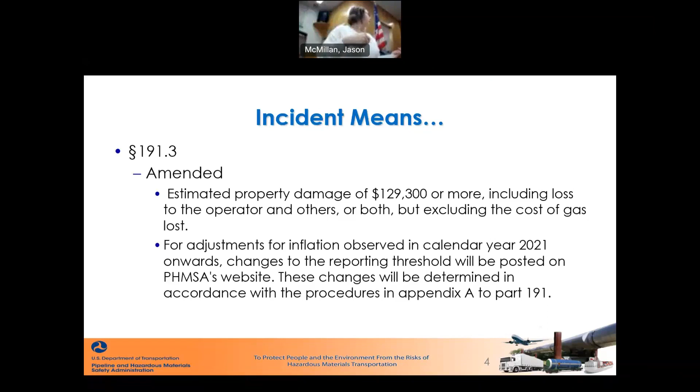That $50,000 threshold was put in place like three decades ago. So with the change in times, $50,000 happened in the blink of an eye, right? So a lot of things became reportable. Now it has increased, so you start at $129,300 — at that point it becomes reportable if there's that much in loss, property loss. That includes loss to you as an operator and loss to others, or both, but it doesn't include the cost of gas. And because it was not done this way before, from now on it's going to be getting adjusted for inflation from 2021 on. As these changes happen, it will be posted on the PHMSA website.

There is a formula in there that they created for making this determination and calculating the cost of living and all this stuff to make the adjustments. It's in Part 191.

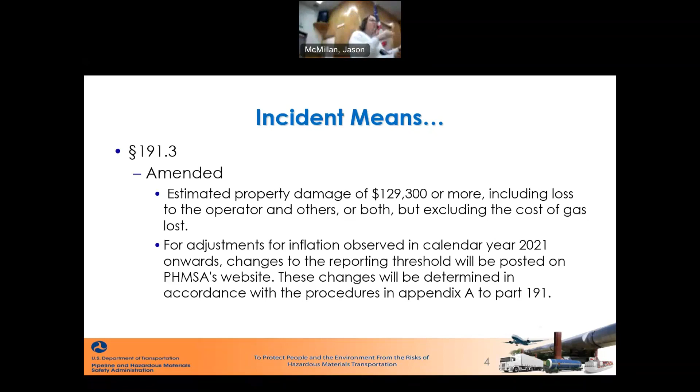Another thing that's going... I don't know, the projector looks a little off. Another thing that has changed in Part 191 was the number of the mechanical fittings failure report.

There used to be options, right, of submitting a dedicated report for things that failed. You could report it every month, or make a dedicated report with your annual report in March. So now the dedicated report has been eliminated. It's no longer required, but you still have to report it under the annual report, under Part C of your annual report. You'll report the number of hazardous leaks that involve mechanical joints.

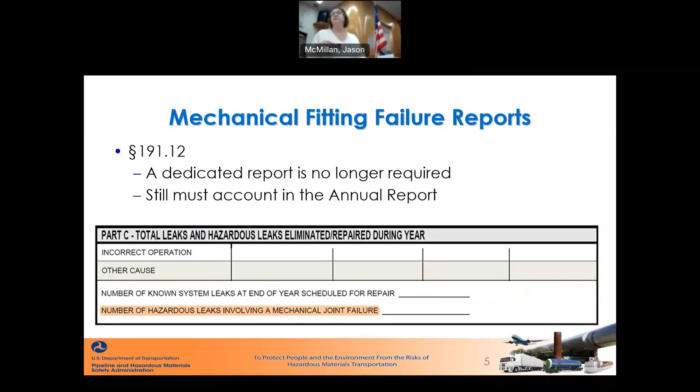One more thing is under safety-related conditions, and this is about reporting exceeding MAOP. It's always been in the code that you have to design the system so it doesn't exceed MAOP plus a buildup that's allowed over that MAOP. This situation has always been in the code, but it was never recognized as a safety-related condition. It had never been required to be reported. So now it has to be reported.

Every time there's an exceedance, and there are specifics under 191.23(a)(6), it will tell you exactly under which conditions those exceedances need to be reported. If your system exceeds MAOP plus buildup, then it has to be reported as a safety-related condition. That means it has to be reported in writing, in a letter titled safety-related condition, and under 191.23 it tells you exactly how you have to report it.

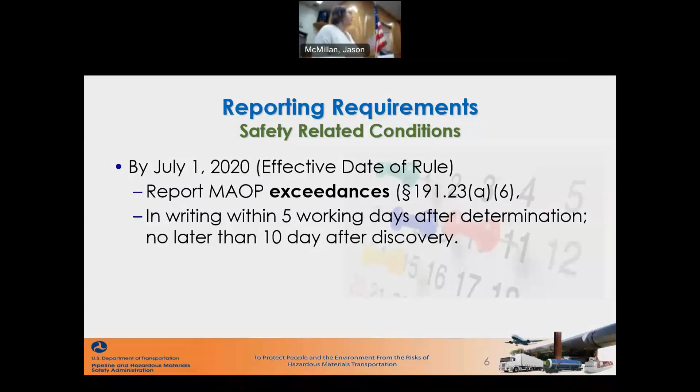Okay, so that's it for Part 191. For Part 192, there are 3 documents that have been incorporated by reference, 3 new documents.

API 1104 has been a document incorporated by reference, just updated to the 20th edition. ASTM D2513, 18A, is also an updated edition. And then ASTM F2620, 19 is a new document incorporated by reference for plastic fusion, and we're going to see where that one applies.

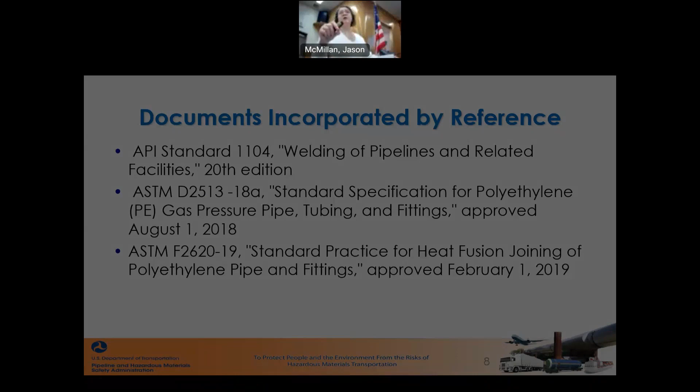That's one of the very important things about the code when you're looking at the incorporated documents, which are in 192.7. One particular thing about those documents is that it's a very specific version that is accepted by PHMSA. So if for whatever reason you needed to implement anything requiring those documents, you or your contractor need to make sure you're following the correct version that's in the code. It's not always going to be the latest, greatest, the latest version. Sometimes we have a 2004 document incorporated by reference in the code, so that's something to keep an eye on.

In the section on limitations for welding and welding operators, it was amended to include that welders can actually weld on a procedure they have done in the previous 7.5 months. Before, it used to be if they had not done this in 6 months, they could not weld to this procedure. Now that time frame has been extended to 7.5 months, but they have to demonstrate that the last time they did it, 7.5 months prior to the current date, it was acceptable under API 1104.

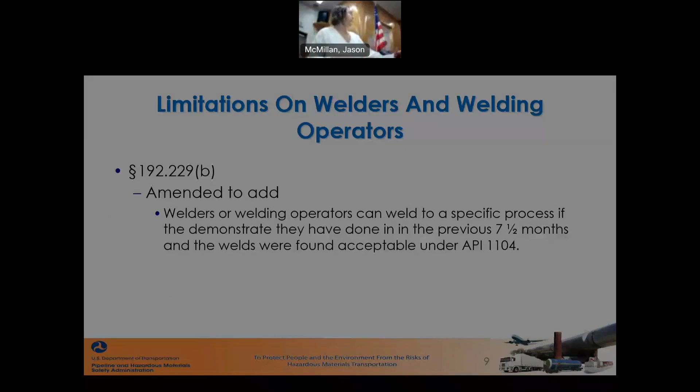For plastic pipe, the qualifying joining procedures under 192.283 was amended to eliminate requiring ASTM D638. Right now it doesn't require that the test be done to that specific standard; it just requires that it's done to a listed specification, meaning any specification that meets that.

And then under 192.285, for qualifying persons to make joints, it was amended to include that heat fusions, except for electrofusions, will be visually inspected in accordance with the new incorporated by reference document, ASTM F2620. So any heat fusion plastic joints, other than electrofusion joints, will be visually inspected following the procedures in the standard.

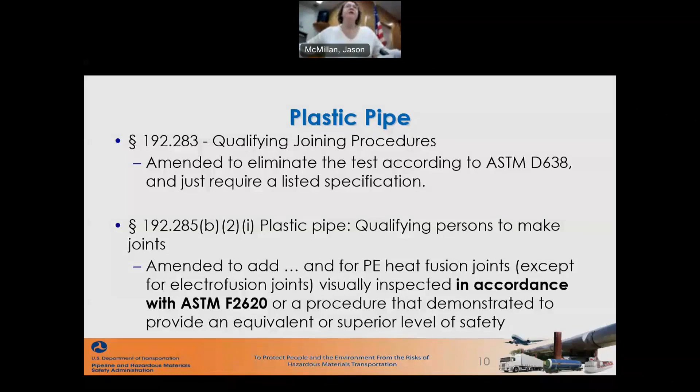That is a debate on whether that is, but a lot of times, most of the times, when a person gets qualified for joining, they also get qualified for inspecting in the same qualification. So it can be done by the same person. Yes, it has to be a part of the qualification.

All right, so when it comes to corrosion control under 465, if you had a rectifier, it had to be inspected every 2.5 months. Go there, inspect it every 2.5 months. Now it allows those rectifiers to be inspected remotely, but at least once a year it has to be done on site. So the 2.5 month interval can be met by doing a remote inspection, but at least once a year you have to go to the rectifier and look at it, lay eyes on it.

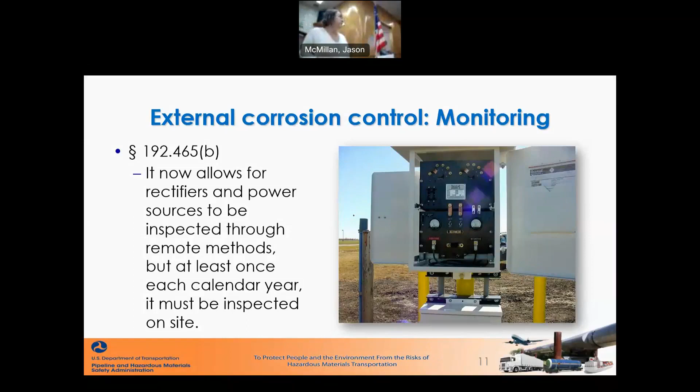No, not necessarily. This is probably pipe to soil potential readings, yeah. Oh, actually this is atmospheric corrosion. Sorry, it's all above ground. So this is all above ground pipe. So above ground pipe, okay?

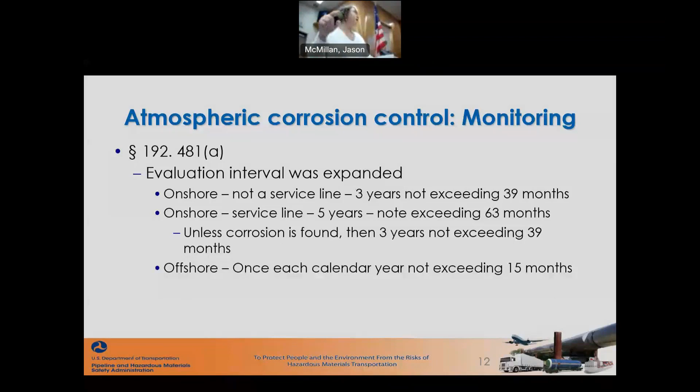Now, this section on the records changed a little bit because of that new way those intervals were split up. So under the corrosion control record keeping, it was amended to keep the two most recent records for inspections of atmospheric corrosion for those pipelines that you're inspecting every 5 years, which would be the service lines. If it's a service line that has no corrosion and it's above ground, we're looking for atmospheric corrosion, and you're inspecting it every 5 years, then you need to keep the 2 most recent inspections for those type of lines in your system. Okay, these are the records that the inspectors are going to come and look at. So basically your last 10 years of inspections, because if you're doing it every 5 years, you keep 2.

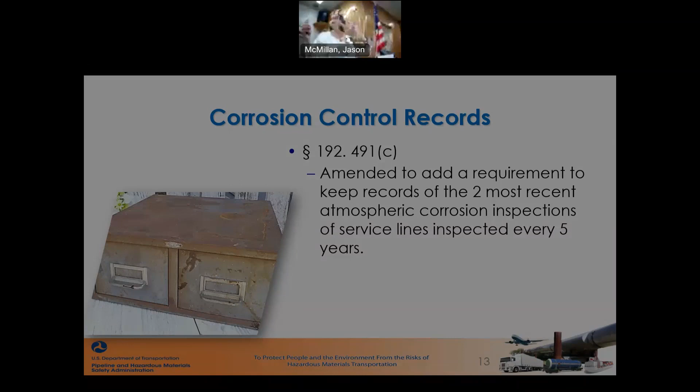And then for MAOP, I think none of you operate a pipeline that operates at 100 pounds or more, but there is one addition when it comes to the factors for the test pressure for establishing MAOP. Any pipeline that is installed after July 1st, 2020 and operates at 100 PSIG or more, this will be the new factors for those pipelines. That's basically for pipelines in Class 1 locations, installed after July 2020.

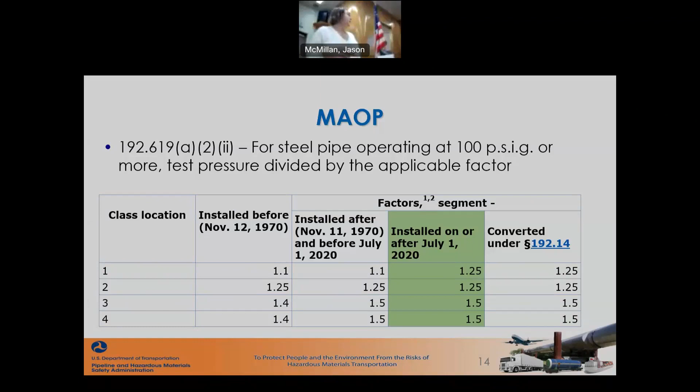DIMP requirements. There are 3 exemptions now for DIMP that happened under 1003, excluding master meter systems completely excluded from the requirements, and excluding farm taps, basically. An individual service line that is directly connected to a production line or gathering line is a farm tap. So they are being excluded from the requirements of DIMP, but other maintenance requirements have been included under 192.740 to make up for eliminating the DIMP requirements. And then individual service lines that are directly connected to either a transmission or regulated gathering pipeline.

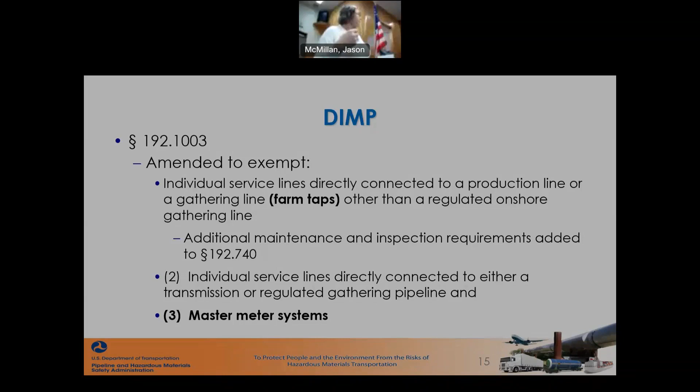And under the requirements of DIMP, identifying threats, now atmospheric corrosion has to be included as a threat. Okay, section 1009 was removed, which was basically what we talked about already regarding 191, the mechanical fitting failures. What does an operator have to do if a mechanical fitting failed? When you read that section, it basically directed you to reporting it. Since there's no direct or dedicated report requirement now, that section was taken out of DIMP.

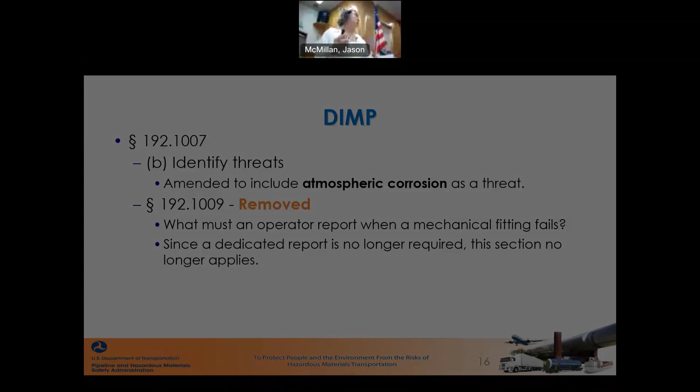Then emergency plans. I think this is where we have the most changes and inclusions, just stuff that has been added under emergency plans. So it's not really a lot, not big changes, just a lot of little changes. So one of the things that has been added, and it's been throughout, you're going to see the common theme throughout, I'm going to be talking about it, is establishing and maintaining communication with a public safety answering point. So I'm going to call that 911 from this point forward.

So before, under emergency plans, the requirement is you have to have procedures for establishing and maintaining communication with public officials, and usually that meant the fire department, the police, the local EMS. Now, usually 911 was excluded, right? And a lot of these calls, because it was not explicitly included in the code, a lot of these calls about somebody calling about a leak go through the 911 system. They call 911, don't call a gas company. They usually call 911, I smell gas.

So to help with that, because as an operator, you're required to have trained personnel on receiving these calls and giving direction to the people that call. And 911 personnel was not being trained on how to receive a call about a gas leak and what to tell people. So now it is required that as part of your emergency plan, you include the 911 centers so they are knowledgeable about your system, how you're going to need them, what are your capabilities. And this has to be a 911 center or public safety answering point that is within the reach of the incident site or within the reach of the operator's facility, or wherever the public officials are at.

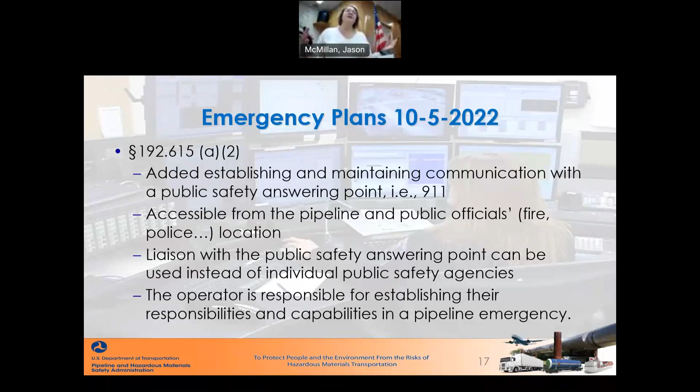Under A6, the procedure has to include actions to minimize hazards to life, property, or the environment by the release of gas. If the release of gas is going to be hazardous to the environment, life, or property, there has to be procedures in your plan to minimize or mitigate the impact. Not mitigate, right? Because mitigate is after the fact, but to minimize the impact. So things such as emergency shutdowns, valve shutdowns, or pressure reduction have to be part of the plan.

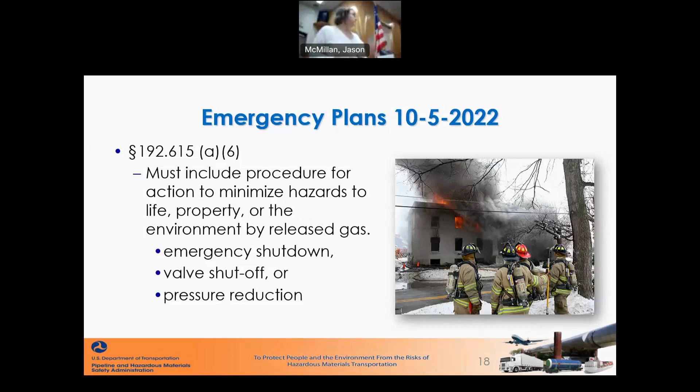And again, under this section as well, it's also expanded to include 911 centers. And like I mentioned before, it has to be 911 centers that are local, within the community and jurisdiction of where your pipeline is located - the 911 center that would cover that area. So those are the 911 centers. 911 centers are regional and local.

So you got to figure out which 911 center is the one that covers, because when you're creating liaison, when a call comes into 911, you don't know where that call is going. Somebody's answering the phone. But when you're creating the liaison effort and you want to send communications, you need to know which 911 center you're sending that information to. So that's why it says it has to be the 911 center that covers the area of your pipeline's jurisdiction - the people that are going to respond and dispatch personnel to an emergency in your system.

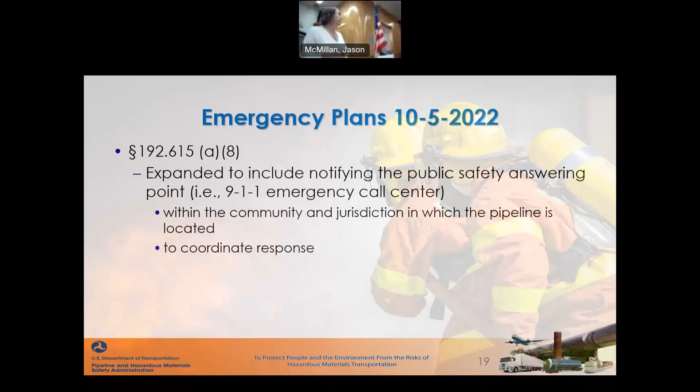There is a new section added, (a)(12), where you have to have a procedure to determine if a notification of a potential rupture is actually a rupture event. So basically, you need to have a procedure in an emergency plan.

There's a new section and a new definition in the code: notification of pipeline rupture. That's a new definition. And what that means is it's referring to the notification of or observation by either an operator, any control room personnel, field personnel, a nearby pipeline or utility personnel, anyone in the public, local responders, or any public authority - basically anybody that observes and this person notifies of an indication that there is a potential unintentional or uncontrolled release of a large volume of gas.

You have to say something, Jason? Uh-huh.

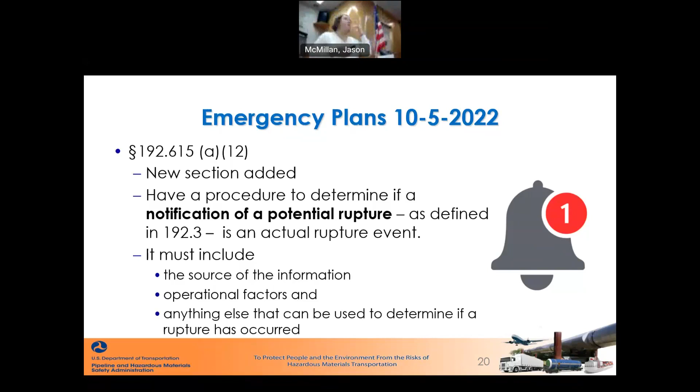And then under 615C, it was amended again to require maintaining liaison with public and safety officials, including 911 centers, to learn and establish responsibilities in a gas pipeline emergency, familiarize them with your capabilities as an operator, and identify the type of emergencies that will be communicated through them.

And you're going to need to explain in your procedures, or in the information you provide them, you might get this type of call. It might be somebody from the public calling in for a gas leak, or it might be somebody calling in for a rupture. So those are the kind of emergencies they might get calls for, and how they are going to communicate that information to you.

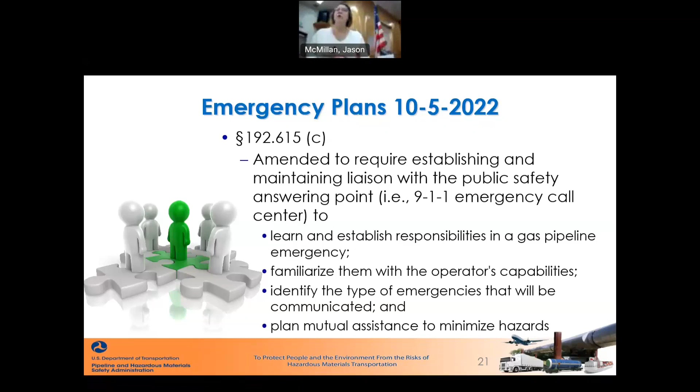And also to plan for mutual assistance to minimize hazards. So you plan for mutual assistance with fire, police, emergency responders, and now also 911 centers.

Now, because of all these changes under 615, it kind of trickles down to investigation of failures. Investigation of failures has always told you that you have to have a procedure to investigate the failures. And it doesn't necessarily mean an incident, but every failure in your system needs to be investigated to the level that it requires. Not everything is going to be a full-blown investigation. Sometimes you just record that a regulator failed, and you just note the circumstances, and that's your investigation. Boom, you're there.

So it's asking you to be a little bit more specific with your investigation procedures, including information for investigating and analyzing failures and incidents, and sending the failed pipe, equipment, or component to a lab if necessary for examination. And beyond that, this is the kicker: now you have to have procedures for using the lessons learned from that investigation to implement or make changes in your system.

And you have to document that, how you're going to implement the lessons learned in either improving your system, creating new training or providing retraining for employees, reviewing your plans if necessary. It's all to avoid the same situation happening again.

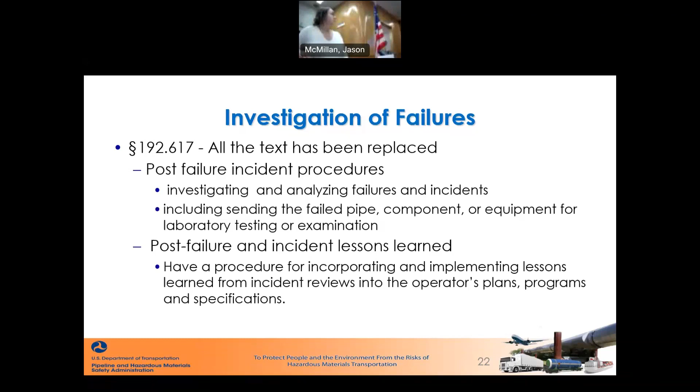Now, this is a new section. This is, remember we talked about the potential rupture? So this is where the new section, 192.635, where the potential rupture comes into play. In your procedures manual, you need to have a section for potential ruptures that will include an unplanned pressure loss that is greater than 10% within 15 minutes. It's outside of normal operating pressures. So you can see what's happening there, right? You're having 10% of gas loss within 15 minutes.

That's a lot of gas loss. So you need to establish in your procedure that this is a rupture event outside your operating pressures, because you're going to have a major pressure loss in your system if something like this happens. Then an unexpected change in pressure, flow rate, or equipment function downstream or upstream, right? If you have a sudden loss of pressure or sudden increase in pressure and you start popping valves, and you see valves popping up everywhere in the system with an increase in pressure, that's an abnormal event or a potential rupture.

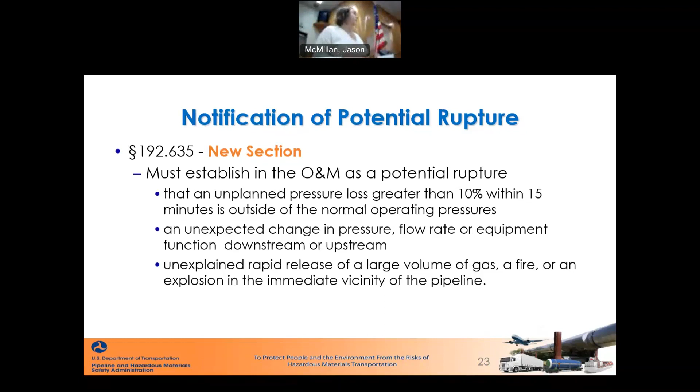And that's it for 192 and 191.

The following section, the Pipes Act of 2020, is basically the law that requires the Secretary of the Department of Transportation to create regulations for pipelines. And that's where PHMSA comes into play, and we create regulation. There is a section under this Pipes Act, Section 114, which is what we're talking about, but Section 114 and Section 113 of the Pipes Act work together to establish the requirements of what we're going to discuss.

Like I've explained in previous days, the Pipes Act is a really hard document to find. Try to Google it - it took me a couple of days to find it. So I saved you the trouble of having to look for it. When you get this presentation, you're going to get this link. The Pipes Act is actually a portion of one of many acts that were published under Public Law 116-260.

So there were many acts - this is a document of 2,000-something pages, like 2,600 pages, a large document. Within that document, there's a lot of acts that were enacted for other agencies, and we made Section R - the Pipes Act is Division R. When you click on this link, it's going to take you directly to the document. It's going to take a little bit to load on your computer. When you open it, just word search 'Division R' and it's going to take you exactly to the text of the Pipes Act of 2020. You have the whole Pipes Act in that document.

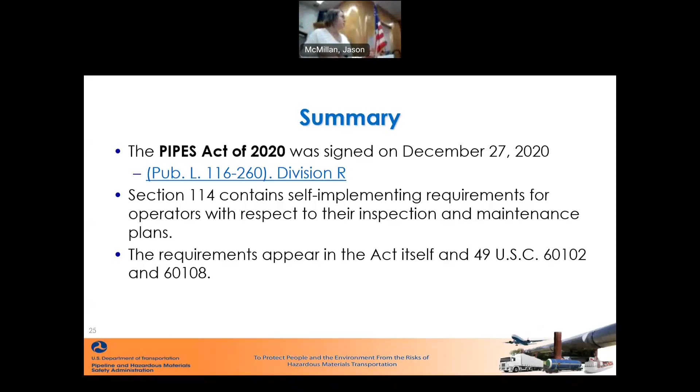And basically, this applies to every operator of a gas pipeline or a liquid pipeline. By December 27, 2021 - one year after the act was enacted - operators have to have or update their O&M plans to address eliminating hazardous leaks of natural gas, minimizing releases of natural gas, and replacing or remediating areas in your system that you know leak.

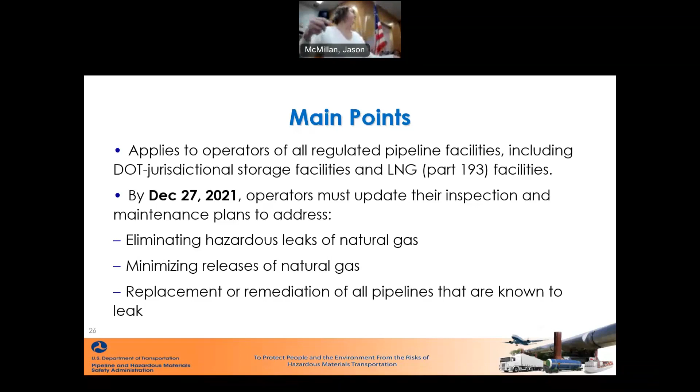So who has to update their plans? Each person owning or operating a gas pipeline facility or hazardous liquid pipelines. It may also apply to liquid facilities that use natural gas in the pipeline facility or other regions of operation. And the replacement and remediation requirement is not limited to just gas pipeline operators.

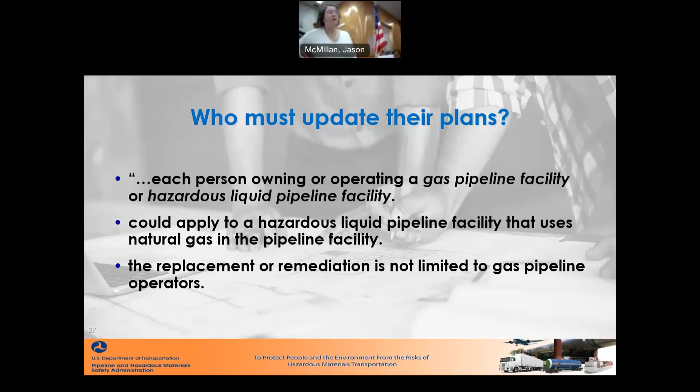What does it look like? Well, this is it - if you look for it, you can Google this advisory bulletin. This is the advisory bulletin number, published in 2021. Basically, you need to have procedures, update your procedures to address what you're going to do to minimize unintentional leaks. That could be from equipment, from pipeline flanges, valves - things that start leaking for no reason, unintended leaks.

But also planned emissions. When you have planned emissions, like when a relief valve works, that's a planned emission because it's doing its job - it's relieving the extra pressure in the system. So that also has to be addressed: what are you going to do in your system to minimize that from happening?

Also, vented or planned emissions happen in pneumatic device bleeds, blowdowns, incomplete combustion, and overpressure protection venting.

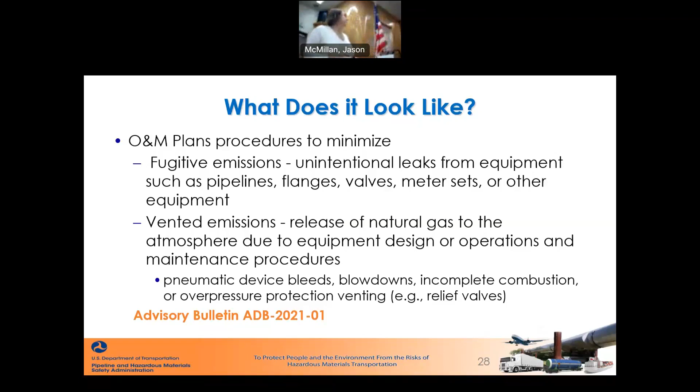The other part of this, besides minimizing those releases to the atmosphere, is what you're going to do about those areas in your system that are known to leak. You have areas with a lot of these little grade 3 leaks, small leaks. You need to remediate that, either fix it or replace it. Your procedure has to address what you're going to do when you find these areas, how long it's going to take, what the possible steps are, how you're going to first remediate, and then if it meets certain conditions, replace it. That kind of language should be in your plan.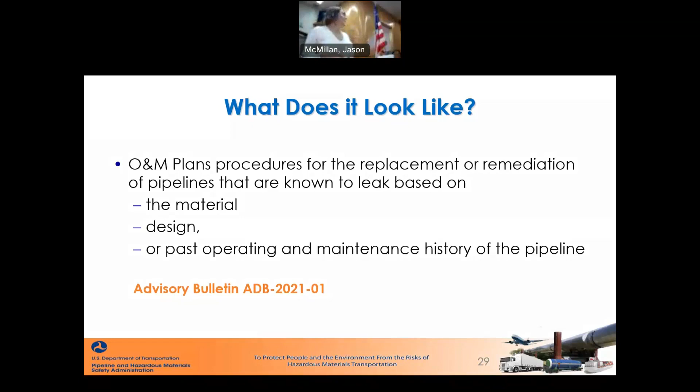Ultimately, it is all addressed for PHMSA to see when the inspectors come and see your plan, your O&M plan. How is your plan helping minimize releases of gas that could be hazardous to people or the environment?

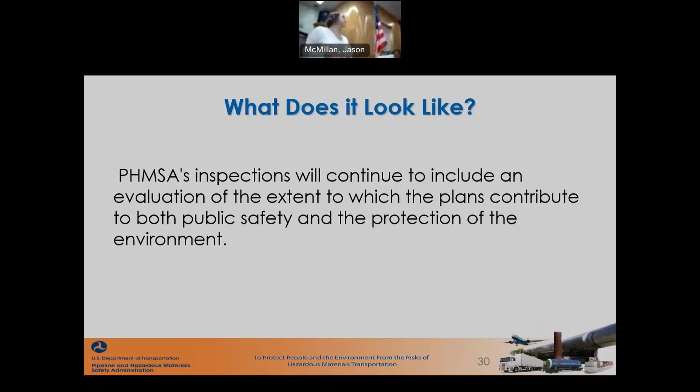And again, this was yesterday. We are a little behind. I know that probably you have some of this stuff already.

When you look at your plans, you do have some of this because we already have requirements for leak survey and repairs in the code. So to a certain point, you're already meeting some of these requirements. I think Jason and the team created a guidance document to help you implement the requirements.

Mhm. Yes. Yes. Yeah. Yeah. All right.